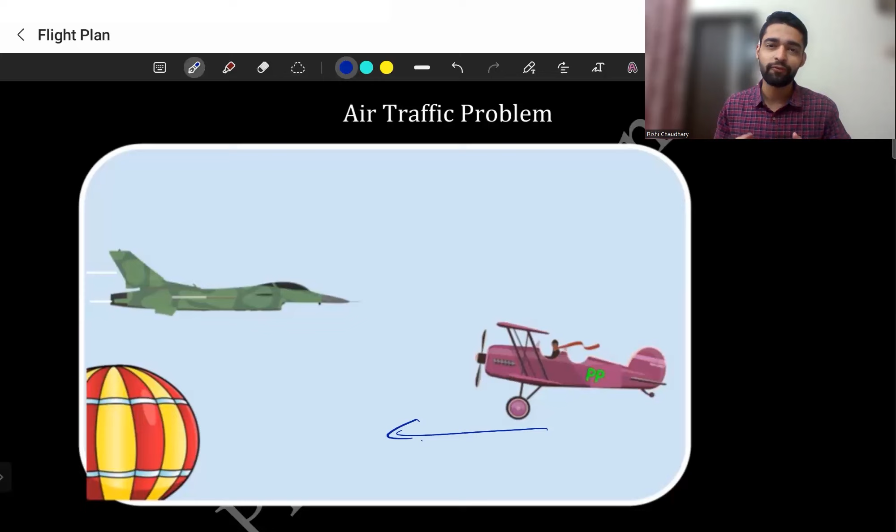As soon as he goes, he was flying very nicely, and he sees a hot air balloon. He realizes, okay, I can fly above it. So he climbs up.

As soon as he climbs up, he sees another obstacle that he cannot maneuver over: a fighter jet. Luckily, the fighter jet pilot was very intelligent and maneuvered over him very fast, so as to save both their lives and save very costly planes as well.

With this situation, I want to tell you something very important. First of all, as a pilot, never even break a minor rule. That is my first suggestion.

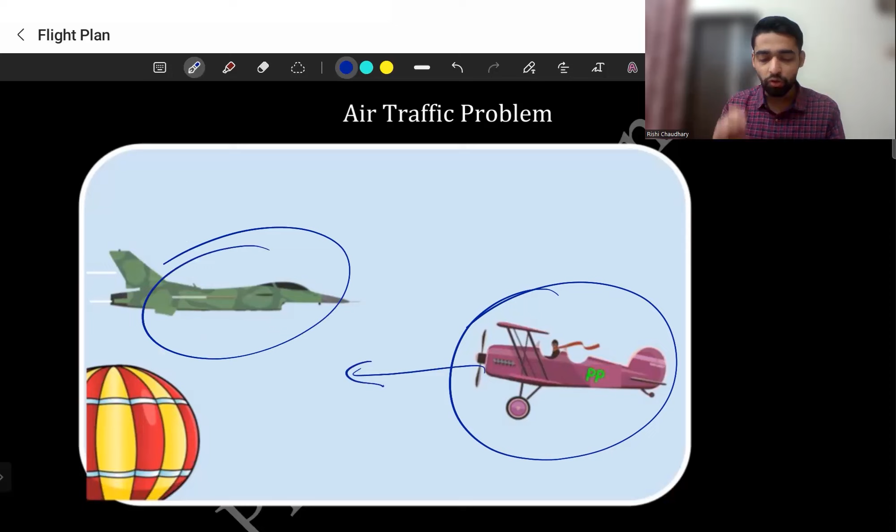Second thing is, if he would have told someone that he'd be taking this route, would this problem have arisen in the first place? The answer is no, it would not have arisen. Why? Because ATC would have known he would be going this way. This plane would be given a particular flight level or altitude, and that plane would be given another altitude to fly, and then there would be no congestion at all throughout the track.

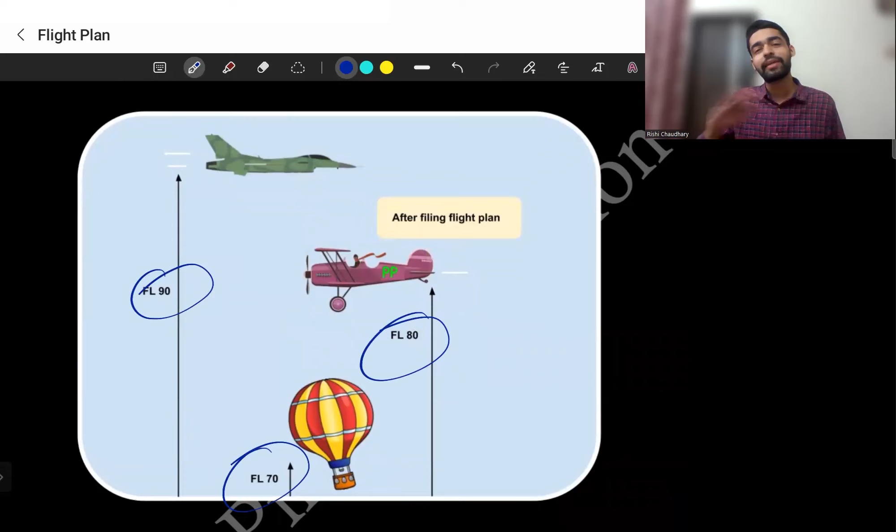So this is the reason why we fill a flight plan. A flight plan is nothing but planning of a trip from one place to another, just like we plan a trip. So here we understood that if he had taken a flight plan with him, made it and given it to ATC, this problem wouldn't have arisen, because planes would have been given 9,000 feet, 9,000 feet, 8,000 feet, and 7,000 feet, and all would be flying very nicely on the same route. Everyone flying so nicely.

Now let's study about flight plan in the most formal way for starters. Let's understand first the importance of flight plan from the exam perspective. RTR, radio telephony restricted, is a subject that has high importance of flight plan, because RTR has a base of flight plan, or we can say flight plan is the base of the subject. Then we have air navigation, where it comes for 3 to 5 marks. In regulation, it comes for 2 marks, meaning one question in regulation.

Now let's understand the formal definition of what a flight plan is. It is a document filed by a pilot, that means you guys, or a flight dispatcher who also calculates the payload and a lot of things, which is verified by the pilot. So they can also fill the flight plan, and once it's filled by either of them, it goes to the local air navigation service provider, that is ATC. They also fill it a bit, and then it goes through further reviews, and after that they all accept that this route is good to go for you. Once this approval is done, then you can fly on that route.

This is done prior to the departure. It makes sense that prior to departure only the route can be confirmed. If you just fly and then say you were flying on this route, that doesn't make sense. So it indicates the plane's planned route. Whatever route you plan will be explained in the flight plan, and it will be filled in that same way.

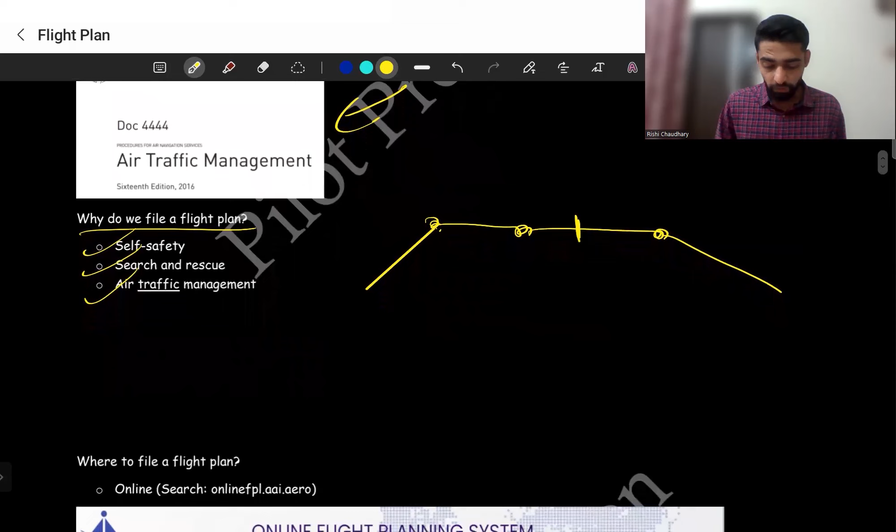Now that we know how to fill a flight plan, we have to also know where to file that flight plan. You can file it online. You can search online, like Online FPL dot AAI dot aero. You can note this down and search it later on. You can see how it looks — it looks fine, beautiful, or we can say whatever.

And then you have to sign up here, as a pilot or a dispatcher, as a certified pilot, not like a fake pilot. Then you have to file the flight plan, and it will be submitted to the local air traffic controller. Either you can directly send a hard copy after filling, or you can email or fax it to the air traffic controller. Or, as a student pilot license holder, you can directly call the ATC and fill your flight plan with them. So only as a student pilot license holder, you can do this thing as well.

Now that we know where to file a flight plan, we must also learn when to submit a flight plan and what is its validity. We already know that we have to submit the flight plan prior to the departure, but how much prior? That depends on the type of aerodrome you are standing at.

If you're standing at a controlled aerodrome, that means it will contain ATC, which is governed either by the government or a private player. Because that region will be highly populated with many flights, you have to fill the flight plan and submit it 1 hour prior to your departure.

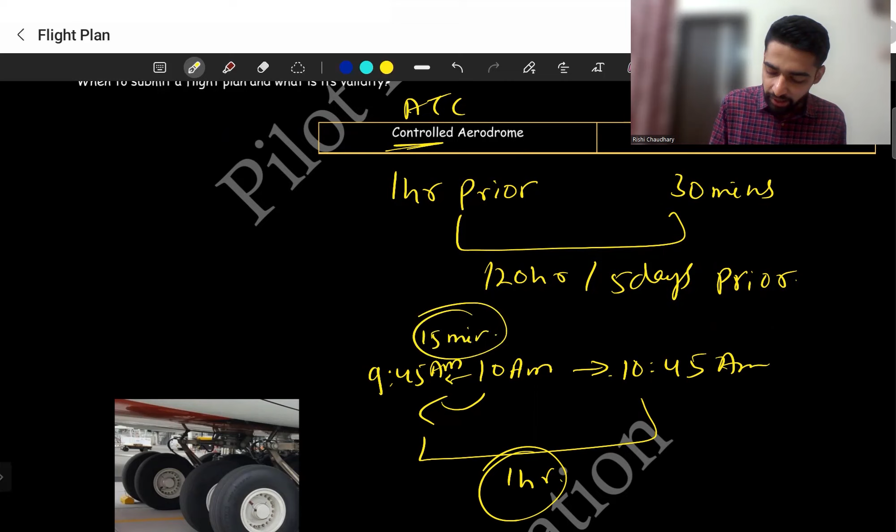So you can see that you are given 15 minutes early time and 45 minutes later time. This is also called EOBT, or estimated off block time - the time when the plane's blocks are removed. Just imagine if 10 a.m. is your EOBT time, in an ideal case you will be removing these blocks at 10 a.m. and then the plane will fly. So this is also called EOBT time.

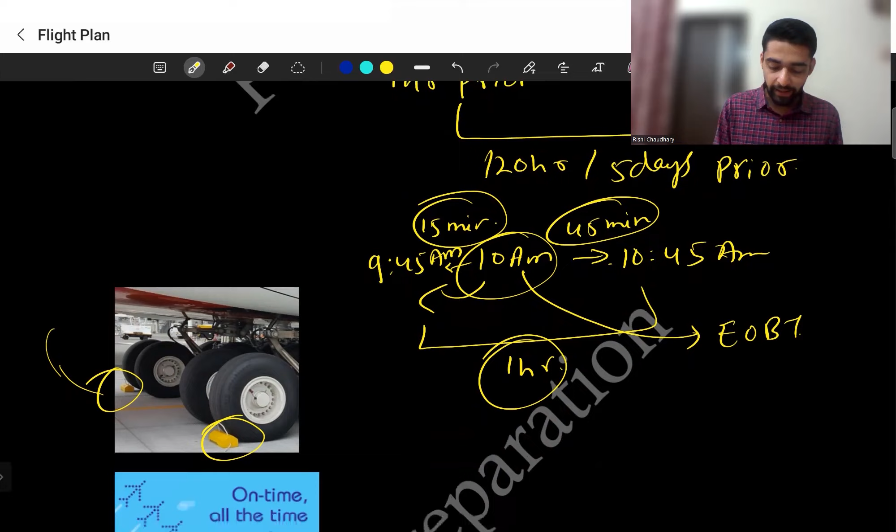Indigo always flies on time all the time. I'm not an Indigo fan, but I'm just saying they have this motto type thing. So how do they do this? Because they fly early. Just imagine if the plane is leaving at 10 o'clock, it will start its procedure by 9:45 and it leaves by 9:50 or 10 o'clock. So by 10 o'clock you are in the air.

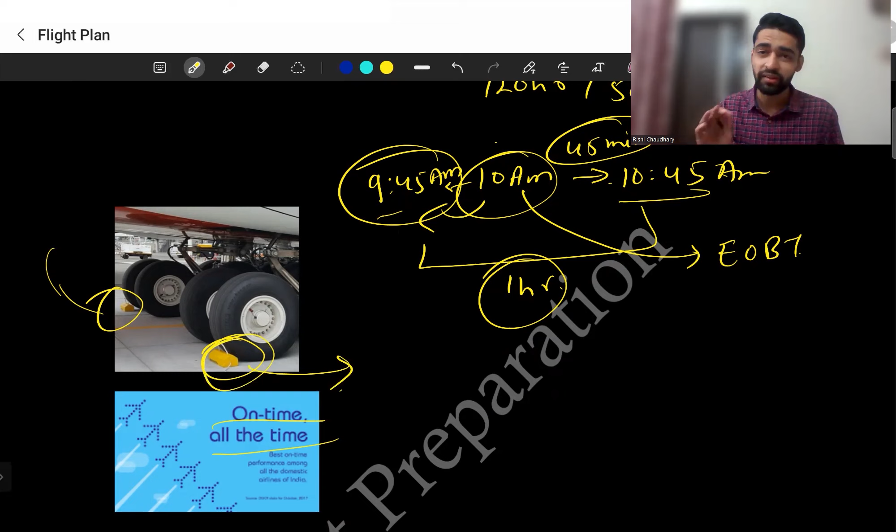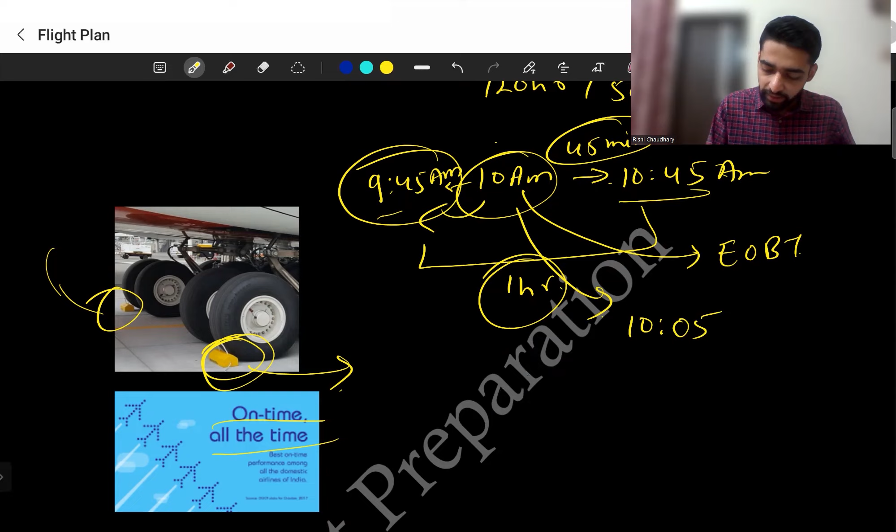But there's a limit to this. Between 9:45 and 10:45, there is one more limit to this - there is a countdown time as well. So just imagine if your EOBT block time is removed, your departure time has started. So once your EOBT time starts, just imagine if you start by 10:05 - if you remove this block at 10:05, then in the case of a controlled aerodrome, you have to fly within 30 minutes.

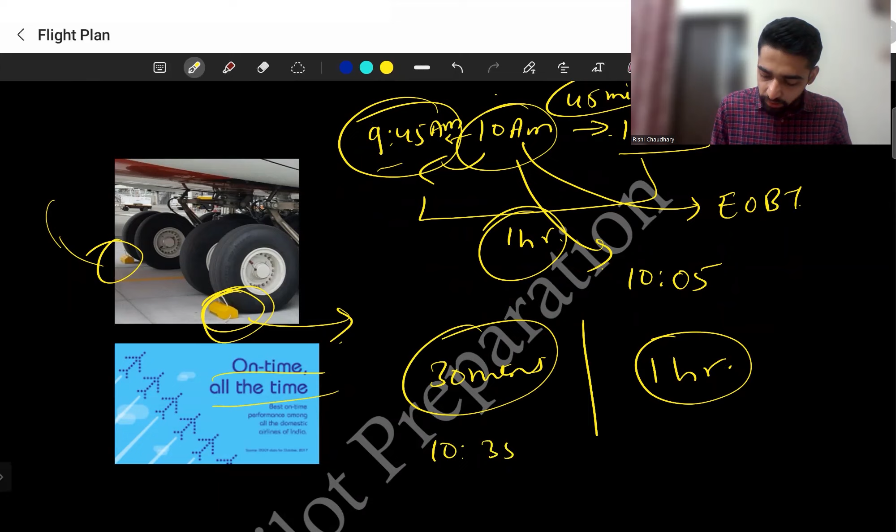You have to fly within 30 minutes. Whereas in an uncontrolled aerodrome, you have to fly within 1 hour. So within 30 minutes means what? That means by 10:35 a.m., you have to take off and fly. Whereas in the case of the uncontrolled aerodrome, you have a very good amount of time to fly.

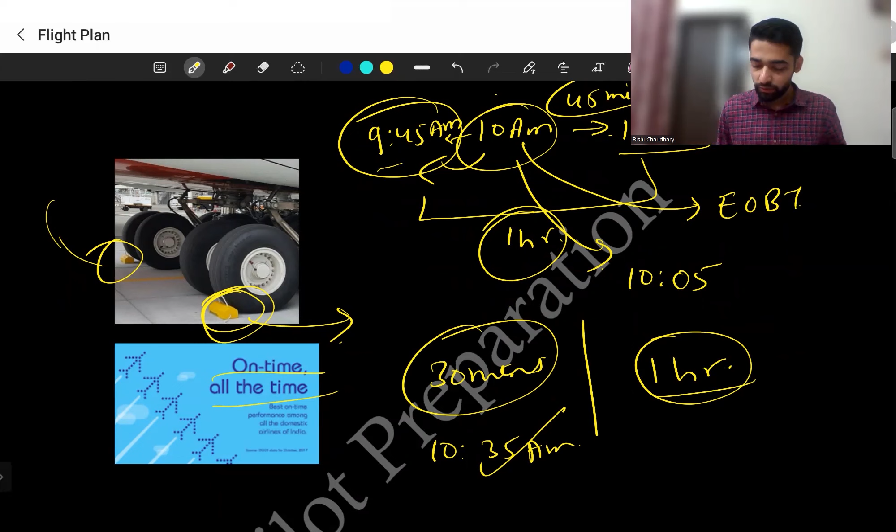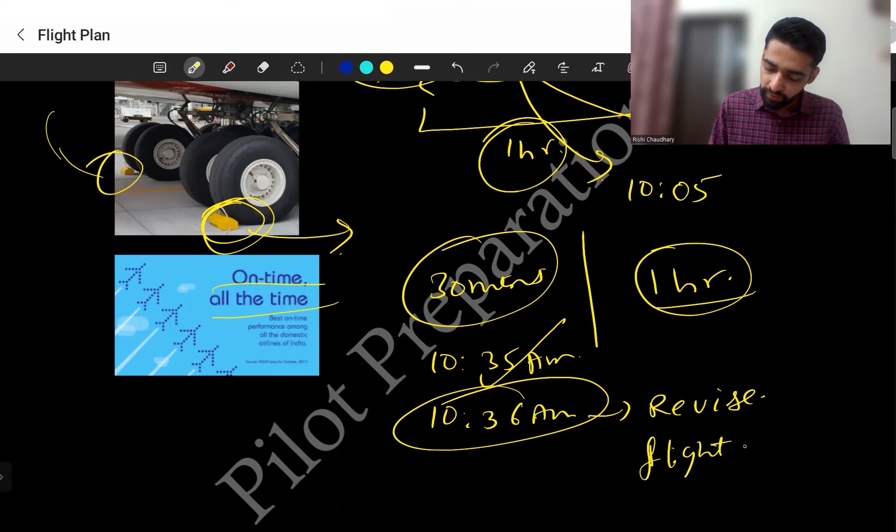So just imagine if it becomes 10:36 and you haven't taken off. Then what do you have to do? Then you have to revise your flight plan with the help of ATC.

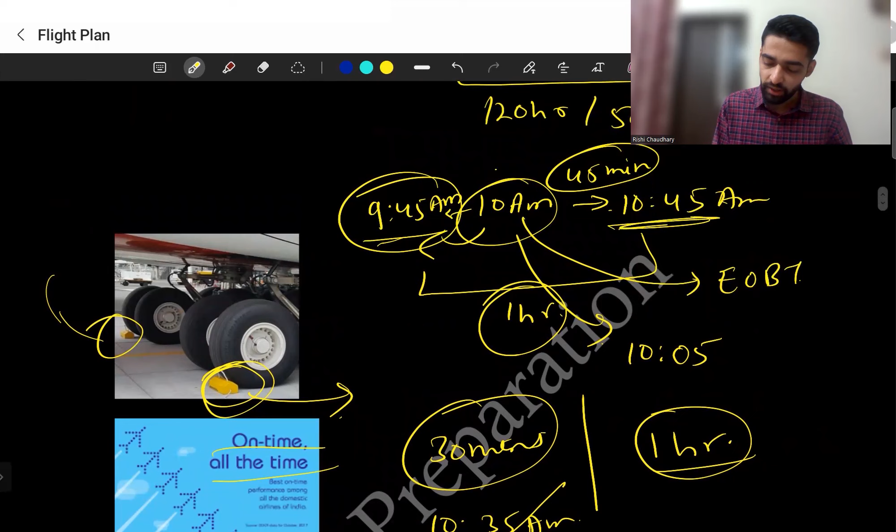And just imagine, because your duration was 9:45 to 10:45, so what happens when it becomes 10:45? After that, just imagine if you're starting at 10:46 a.m., then you have to again apply for the flight plan by a call or something. So you have to redo or make a fresh flight plan.

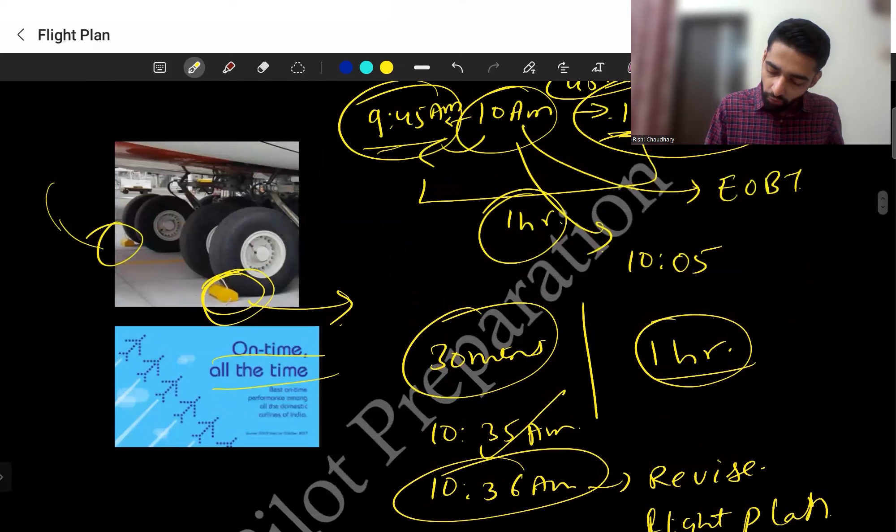But why does this happen? We'll learn that we are given two approval codes - the first is the FIC number and second is the ADC number. These two numbers get rejected, or lose their validity, once you exceed this time of 10:45 a.m. Then you cannot revise it, you have to make it afresh, because the FIC number and ADC number become invalid, as there is new traffic now after 10:45, after your scheduled departure timing.

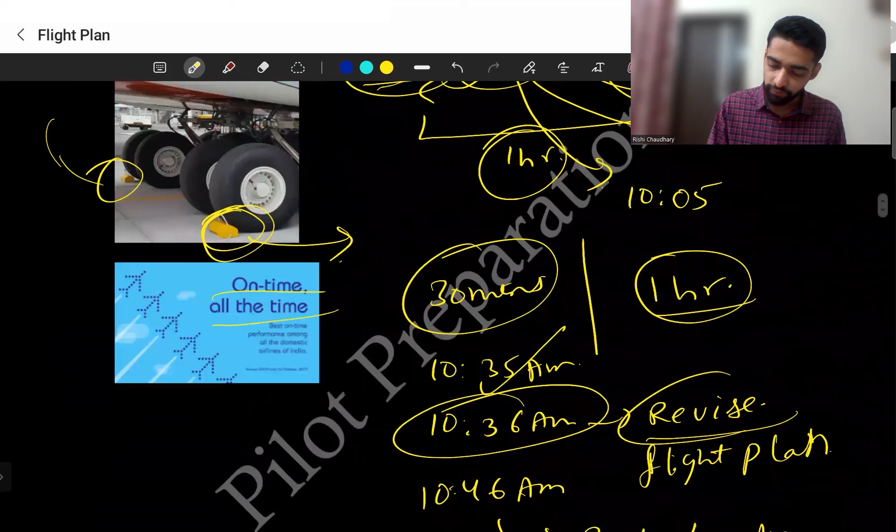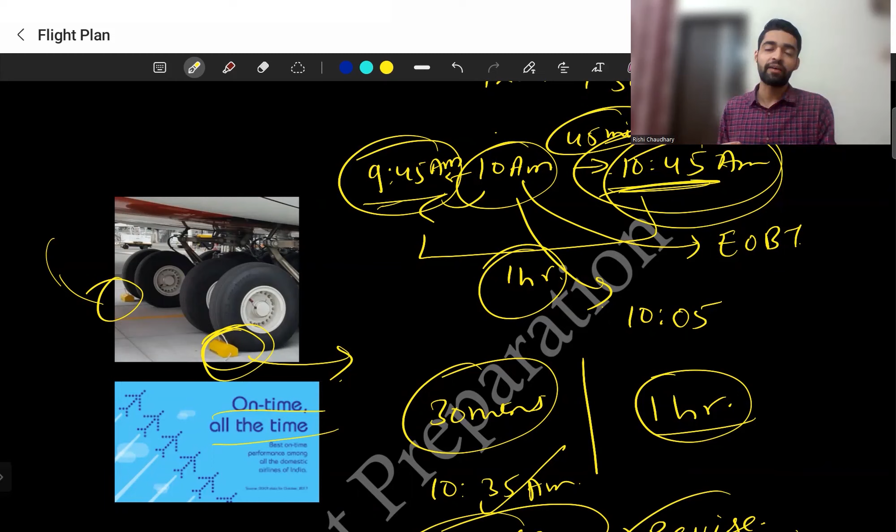There is a new amount of traffic, and they will be flying at different heights, going to different routes, and there could be more traffic at this time. So that is the reason you have to make a fresh flight plan.

Now you can imagine how tough or repetitive it would be for a person who is flying weekly or regularly to a particular route every time. So actually we have a repetitive flight plan. In that case, when you have a repetitive flight plan, you have to file that flight plan for the first 10 occasions.

So just imagine if you're going from Delhi to Kolkata, then you have to fill the flight plan Delhi to Kolkata once, twice, thrice, and up to the 10th time. After that, all the information of your flight will be there with the ATC, and it will come under the repetitive flight plan. So you don't need to fill it ever again, unless your timing changes - then you have to again fill it for 10 times. Okay, so this is the benefit of the repetitive flight plan.

Now that we have filled our flight plan, where does all this information go after submission?

It goes to different regions. We have 4 divisions, also called flight information regions, FIR - not first information report, but flight information region. These are Kolkata, Delhi, Mumbai, and Chennai.

Whatever information you have filled is verified, and once verified, you are given an FIC number, which is an approval number or approval ID given by these centers. If these centers are busy, there are 22 nodal offices where your flight plan goes. Either of these 22 offices will take your flight plan and give you the FIC number.

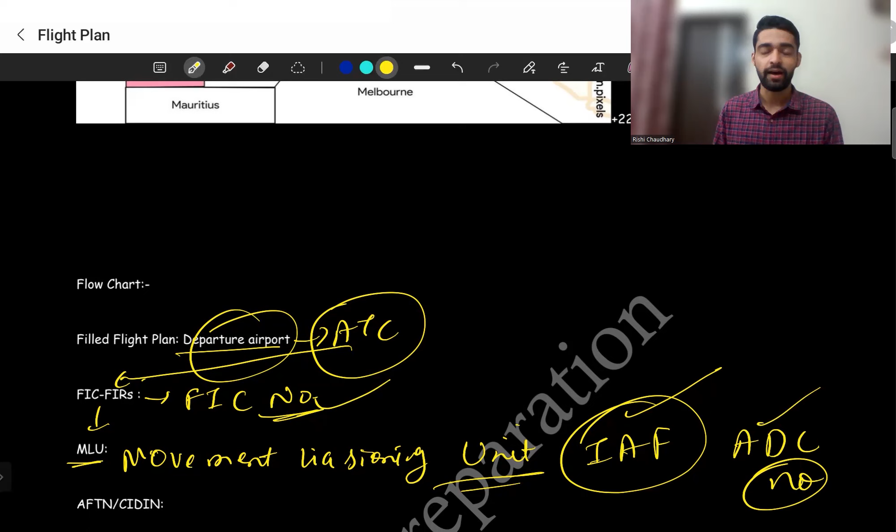Once you get the approval, everyone should know where you're going. Just imagine, if you're going from Delhi to Kolkata, then everyone between those stations should know your route. So to all the stations, airports, or checkpoints, your flight plan will be given through AFTN or CIDIN.

AFTN means Aeronautical Fixed Telecommunication Network.

The CIDIN network is also called Common ICAO Data Interchange Network.

Let's come to the last part, some flight plan abbreviations. There are different flight plan abbreviations which we use and write at different points of time. The four types of abbreviation are PLN, CPL, FPL, and RPL.